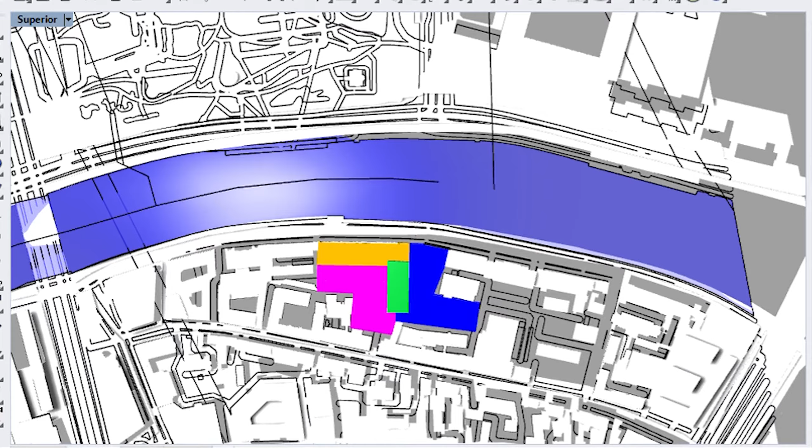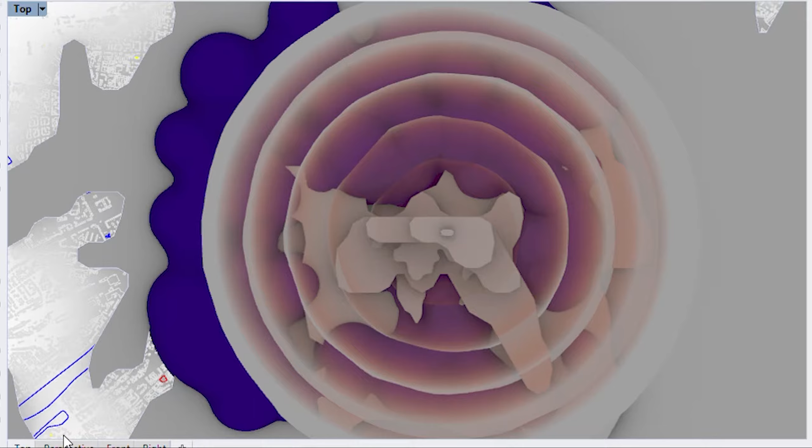Other factors that could affect our project are the wind or the noise.

The project arises as a twin of two programs, an intergenerational residence and Russian baths. The proposed spaces respond to the needs of these uses.

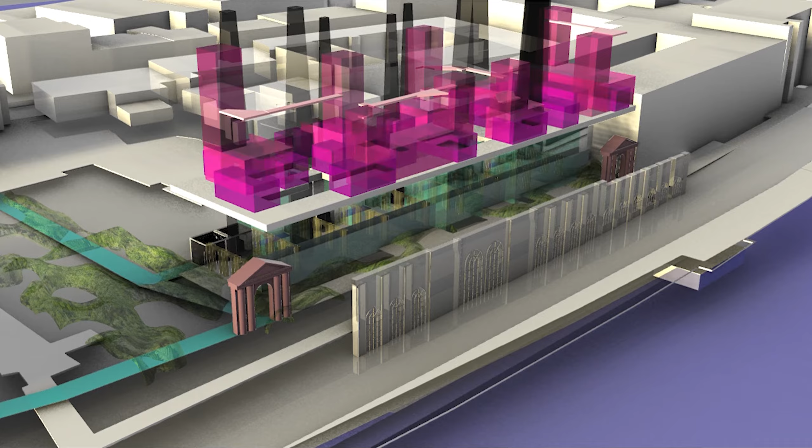The space is configured inside the volume of the pre-existence, opening for lighting, ventilation, and chimneys for smoke evacuation. The house is placed on the roof in the horizontal plane for the elderly and the towers for the young, generating a mixed plan of coexistence.

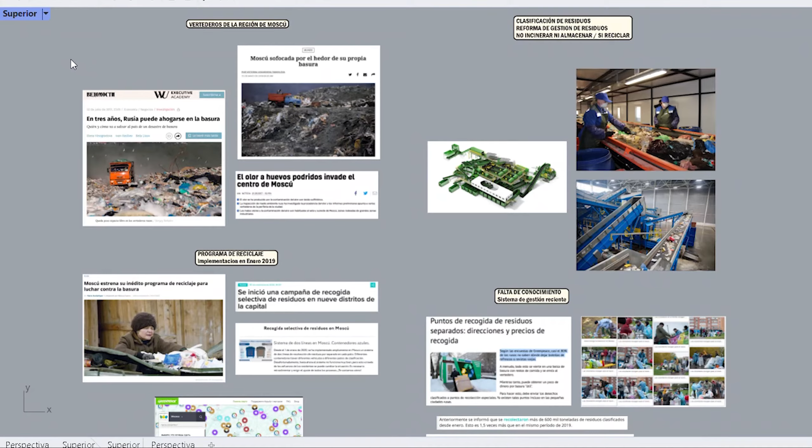In the context of a growing environmental emergency caused by an inefficient way of dealing with garbage in Moscow, and the lack of waste sorting centers, a model is needed that creates a symbiotic interdependence of large recycling facilities and public programs. The objective is to guarantee its inclusion in the urban fabric and avoid the export of more than 90% of the waste to landfill, integrating its treatment in the city.

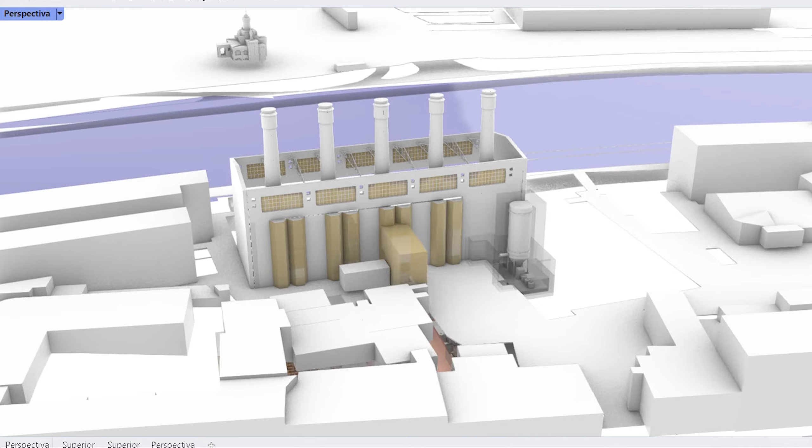This infrastructure includes a waste classification center, a waste treatment center, and a textile industry that will be supplied with recycled raw material, in order to raise awareness and make garbage a recognized benefit for its inhabitants instead of a taboo.

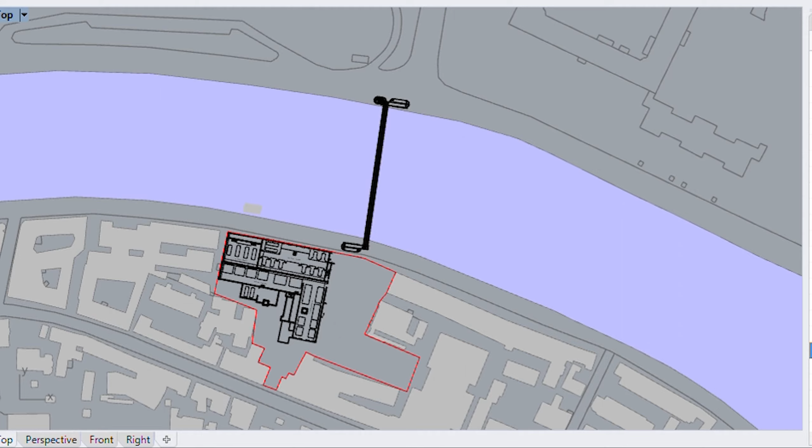The facing part of the river will be made up of a multi-religious center destined for all believers in the world, such as Christian, Orthodox, Jews, and Islamics. In the inner part of the plot will be an educational center, where they will have their workshops, classrooms, and libraries.

These two parts will be connected by a green common area, understood as a public square but covered, supporting the climate condition of Moscow during the winter.

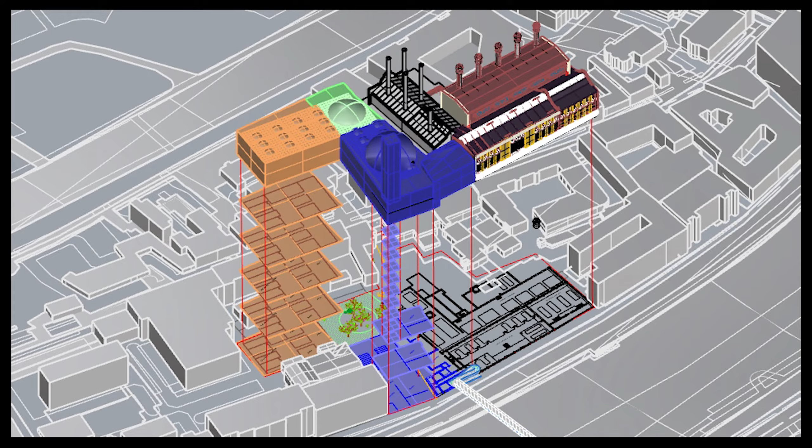The multi-religious center will be composed with a tower to establish a connection with the context, having views to the park, to the Kremlin, and significant buildings around.

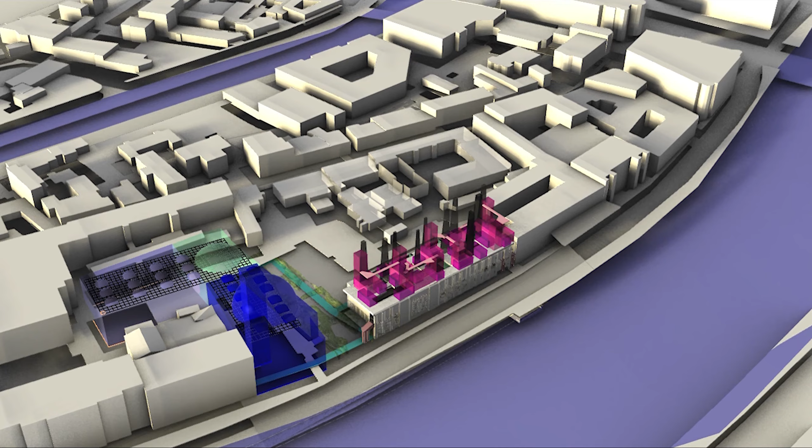The final volume is completed with a common hosting block in height and with continuous access via a transversal axis. A pedestal path is proposed to isolate noise and odors.

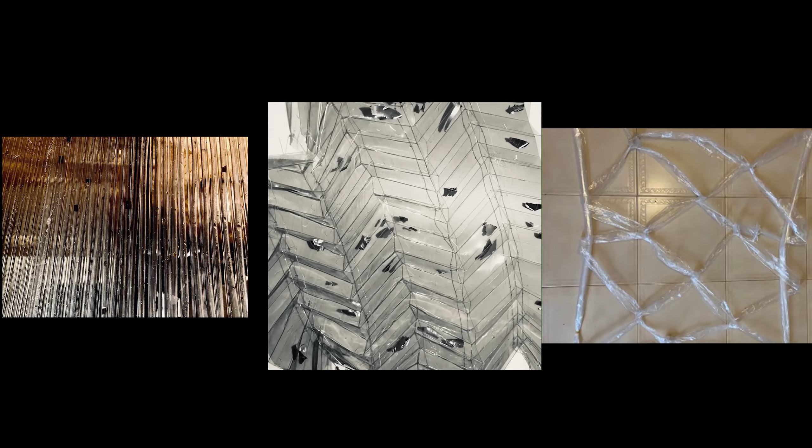The prototypes: each member of the cell works with a different prototype but with a certain similarity in terms of materiality. We all work with plastic, and there is also a common interest in the quality of transparency.

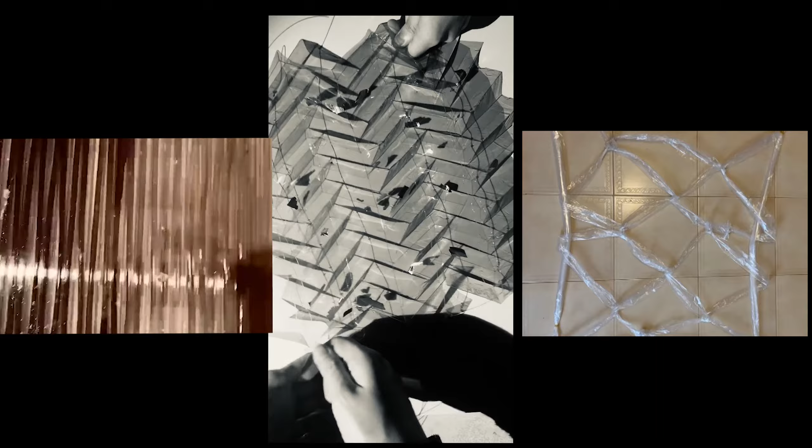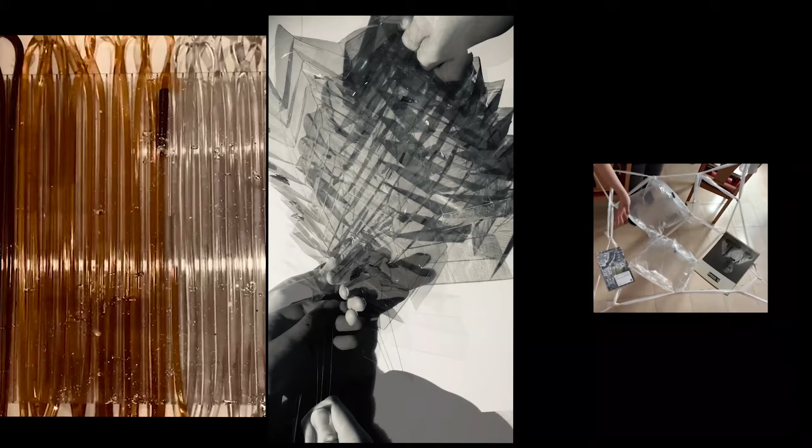In Oli's case, it works specifically with a thermal insulator with different origami folds sewn between layers, with heat-reactive shape memory polymer. The prototype generates movement as an environmental alert device in the case of lack of recycling.